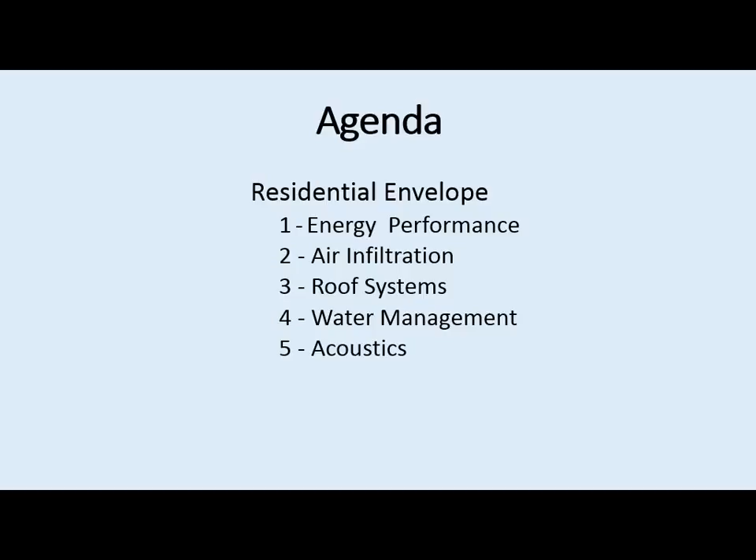I've identified 5 major subjects I'd like to cover, starting first with energy performance of the envelope, and then getting into the details of air infiltration, roof systems, water management, and acoustics.

In terms of energy performance, I've identified 3 major driving forces. First is energy codes, and I've spent a good deal of my professional career in the development of those. We also use economics, which are driven by fuel prices and construction costs. And we have environmental goals as a driving force for energy improvement.

If we want to talk about energy codes, we need a little clarification on definitions. The basis for energy codes are heating degree days base 65, cooling degree days base 50, and moisture levels - moist, dry, and marine. Once you define the climate zone, we look at the thermal performance of the envelope in terms of its thermal resistance, or R value, thermal transmittance, or U factor, and the solar heat gain.

This applies to fenestration, and that's a term for light transmitting devices. Not just a window, but it could be a glass block, or anything that transmits light.

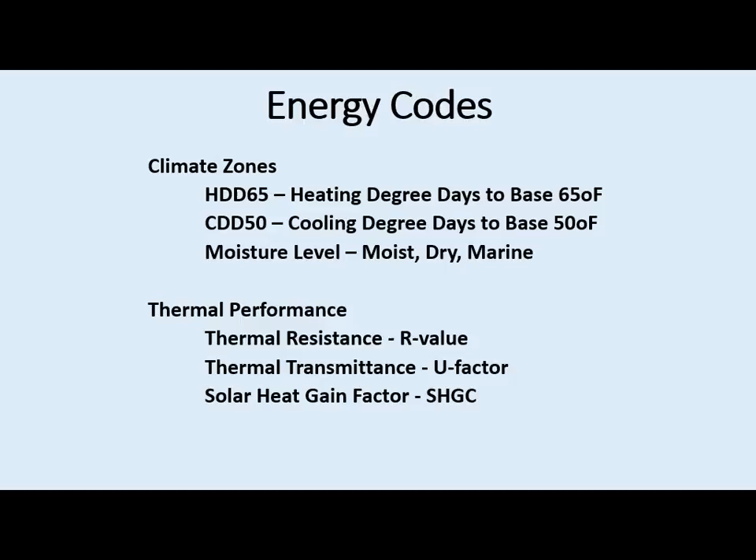So if we look at heating degree days, what are they? Starting with, on the left, we have heating degrees base 65. What does the base temperature refer to? Basically, it's the balance point of the house.

This was determined originally in the 1930s when people were delivering coal to homes, and they were looking for some weather measure to figure out when they needed to make the next coal delivery. They found that 65 degrees was a good correlation temperature. So that was used for many years, and it has been defaulted into our current codes today. It's by no means the balance point of a house today - a good energy-efficient house will have a much lower balance point temperature.

The way it's calculated: you look at the daily average temperature, shown as a dotted line on the left for heating, with 24 measurements for the day. The average is the dashed black line. In this example, I'm looking at 40 degrees as the average temperature. Our base is 65, so for that day we have 25 heating degree days. Each day of the winter we add those up, and that becomes the seasonal value.

24-hour measurement seems like a reasonable way to calculate the average, but it's entirely too sophisticated. So what's done is they take the maximum and minimum temperatures and average those to come up with the daily average temperature. The reason is that they don't have 24-hour measurements at all the weather stations - only first-order stations, about 1,000 of them, measure hourly temperature. Second, third, and fourth-order weather stations only measure max and min temperatures, which is why they adopted that process. That defines the heating side.

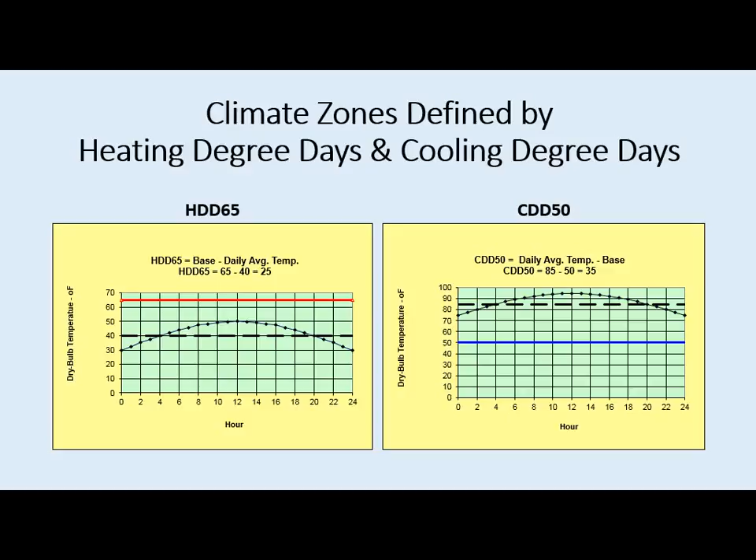So those are the 2 weather metrics used in energy codes. But how does that compare to long-term averages? I looked at the historical data for Columbus. On top we see the heating degree days, which are quite variable, and the same for cooling degree days on the bottom.

For codes work, we use a long-term average. The first set of codes used a 30-year average of weather data to set the codes. More recently we've gone to 15-year weather data, and we're seeing a change in what the codes look like because of that.

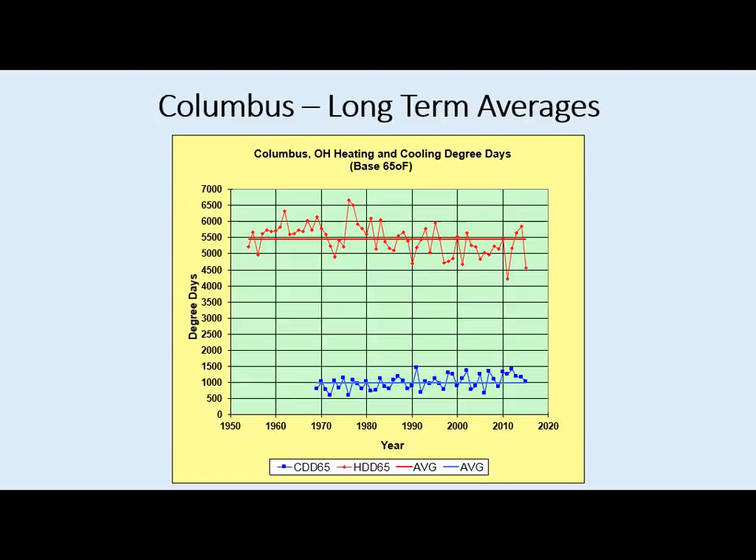So if we look at a code today, it's broken down by climate zones, and these are defined by the heating and cooling degree days. What are shown here are the 8 climate zones, starting down at climate zone 1 in Miami, coming up to climate zones in Ohio, which is predominantly climate zone 5. But along the Ohio River, there's climate zone 4 available. That's what's in the codes today, but that's changing.

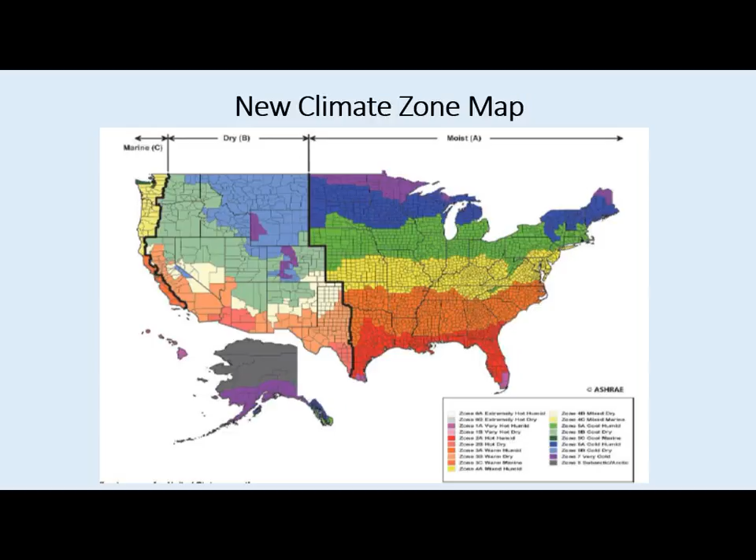We've just published the latest versions of the standards for 2016, based on the new climate zone map. There's still the same number of climate zones, but where they are has shifted. For Ohio, the current code has 9 counties along the Ohio River in climate zone 4. But in the new code, we're going to have 24 counties in climate zone 4, Franklin County being one of them that has changed from climate zone 5 down to climate zone 4. So it's gotten warmer in Columbus, which changes the criteria.

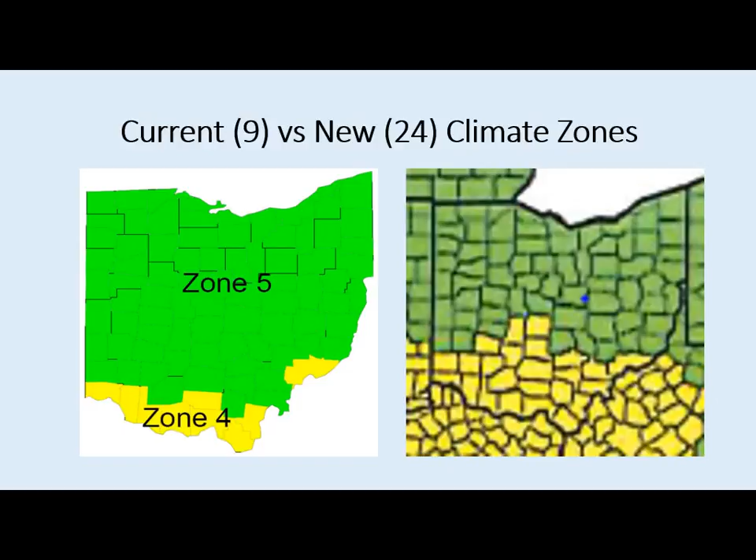The way we represent that is a map showing heating degree days on the horizontal axis, cooling degree days on the vertical axis. I plotted 4,000 plus stations in the U.S., and in the center of it are all the locations for Ohio. The little yellow triangle shows the original version of Columbus, and the dot shows the current version. It just crosses the line at 5,400 heating degree days. That's what changed it from climate zone 5 down to climate zone 4.

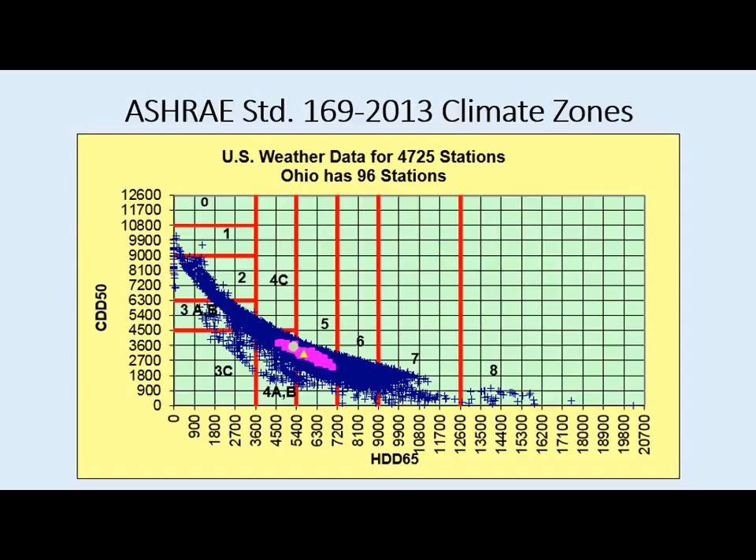If we look at the first energy code in the United States, it was published in 1975 following the 1973 energy oil embargo. The goal was to eliminate the lowest 20% of the housing stock being built at the time. That was developed by a committee within ASHRAE of 100 people, 10 subcommittees, 10 people on each subcommittee, and they used professional judgment to set that criteria.

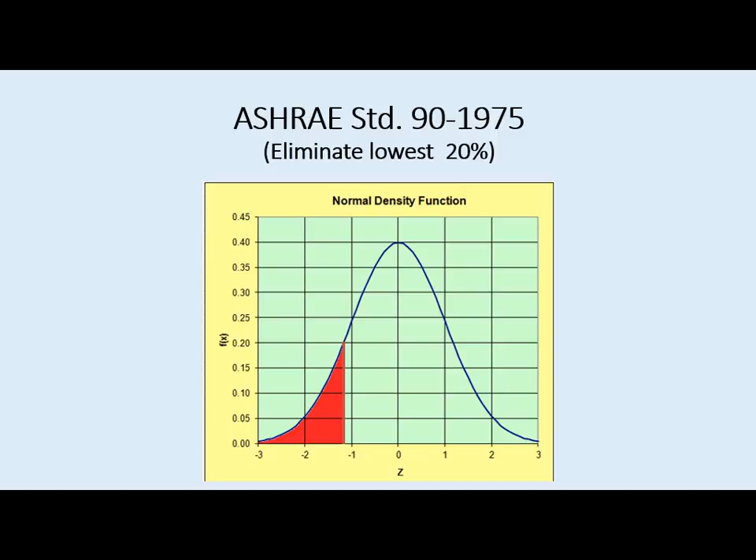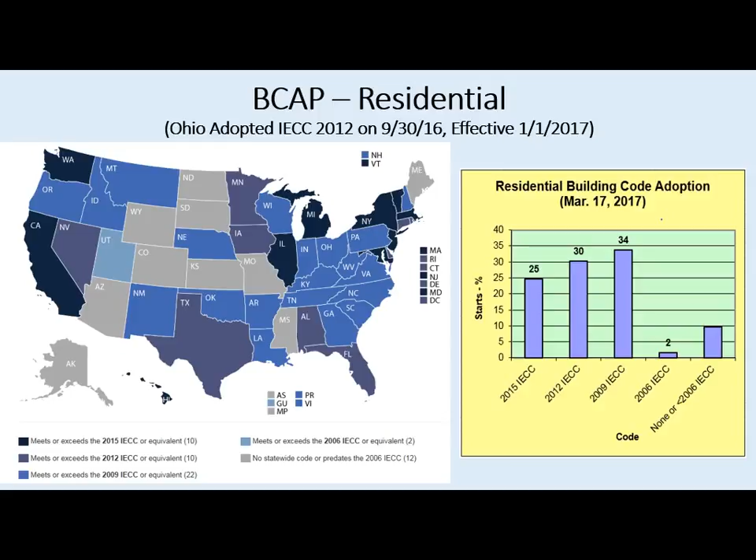We see that the predominant adoption is still at 2009. We're seeing increases above that, but we also have the laggards—a couple locations still using 2006, and about 10% of housing starts are covered by no code at all. So there's still a lot of opportunity for improving energy performance just in code adoption. This has become a recent focus of the Department of Energy, to encourage states to maintain current versions of energy codes.

When we talk about the criteria in energy codes, one of the major variables is thermal resistance, called the R value. I've listed some typical materials, starting with a single sheet of glass, which has an R value of 0.1. An asphalt shingle is 0.4. A half-inch drywall is about 0.45. A half-inch oriented strand board is 0.6. Aluminum siding is also 0.6. This next one is really important, and that'll come into play later: an 8-inch concrete block has an R value of about 1. Also, 8 inches of solid concrete has an R value of about 1. So when you build your foundation, you're not getting a lot of thermal protection from the masonry units themselves. Carpet is 2. A double pane window gives us an R value of 3.

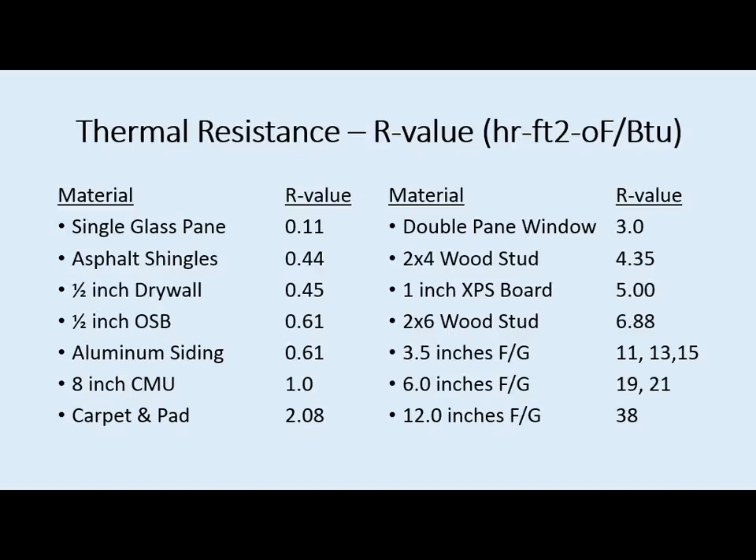A 2x4 stud, a common construction material, is a little over 4. A 1-inch XPS insulation board is R5. A 2x6 stud is almost 7. Then you get into insulation, and depending on the density, a 3.5-inch thickness cavity can be 11, 13, or 15. A 6-inch cavity can be 19 or 21, and 12 inches can be an R38. So this kind of calibrates you on the values that appear in the energy codes themselves.

If we look at the 2015 residential code, it's broken down by climate zones. We have climate zones 1 through 8 today. Going forward, we'll have 9 climate zones, adding a new climate zone 0. It doesn't appear yet in the 2015 standard.

Climate zone 0 is developed for international applications and focuses on locations centered around the equator, so there are no U.S. locations in climate zone 0. That may not appear in future energy codes for the U.S., but the work we do for international standards is very important.

What we see is that the criteria for fenestration is listed in terms of U factors. The U factor is just the reciprocal of the R value, and it's for the entire assembly, so you're looking at the total performance of a window unit - that's the glazing unit and the framing. So it's a composite metric.

Similar U factor for skylights. Then we have the solar heat gain coefficient. The values start out at 0.25 and go up to no requirement. The scale is 0 to 1, where 1 represents the solar heat gain through a single sheet of glass. So if you'd like to control your solar gain, you'd want a lower value than 1. A value of 0.25 in climate zone 1, near Miami, is a low value.

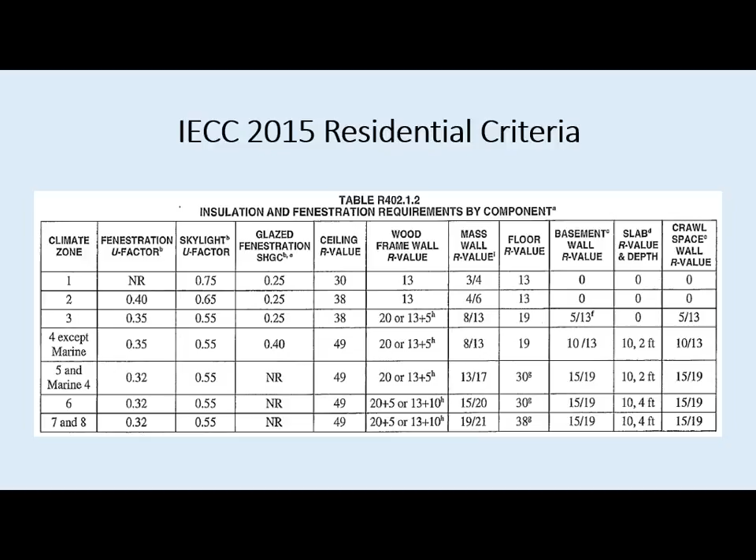In terms of fenestration, what I've shown here is an example of the options available. I've shown 173 fenestration options, and then look at what happens by climate zone.

The first one is climate zone 1, which is the yellow dot, showing on the horizontal axis a U value of 1, where there's no products there. But you also have to meet a U value or a solar heat gain coefficient of 0.25. So in order to meet that requirement, you'd have to pick a material with a U value on the order of 0.6 at best. So you're going to do better than what the code requires just to meet it, because there are 2 criteria.

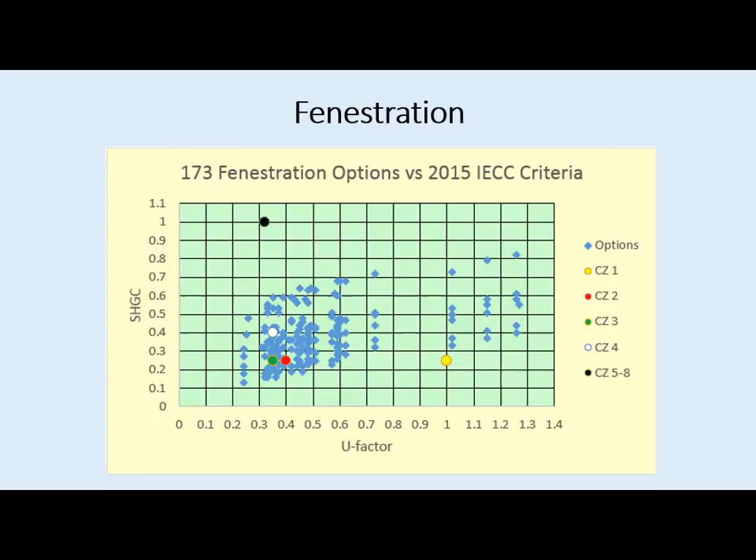We have similar trends in climate zones 2, 3, and 4. When we get to climate zones 5 through 8, we've got the black dot, which shows a solar heat gain factor of 1. There's really no requirement in cold climates to reduce solar heat gain, but to meet the U factor, you're going to have a solar heat gain factor on the order of 0.6 or less. So the codes are set not to limit construction options, but to give you choices.

Once you make those choices, what kind of performance do you get? I've looked at 3 different locations. The first one, on the left, is for Miami, looking at the energy performance of a 5-foot window, whether it's single, double, or triple glazing. You can see there's a tremendous impact due to orientation, which makes the design of your house important in terms of where you place your windows - there's a big energy consequence of that orientation selection.

If we look at the middle graph, this is for St. Louis, similar to what we'd see in Columbus. You see the introduction of both heating and cooling impacts. Again, orientation shows a big impact in terms of solar energy, so orientation is also important in the center zones of the country.

The third graph is for predominantly heating, this is Bismarck. You see predominance of heating energy use and cooling energy use, but again, very sensitive to orientation. So that's very critical in the overall design of your house.

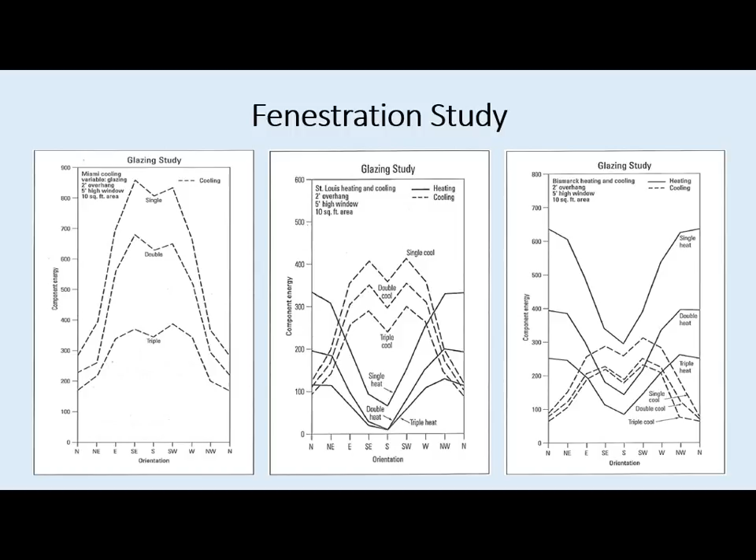One of the major driving forces in developing energy codes are fuel prices, and what we see is over time they have continually increased, but it kind of does this in steps. We start with looking at heating and cooling energies - they're relatively flat, then they go through a transition period. The overall trend is fuel prices are increasing, have been, and probably will continue to increase.

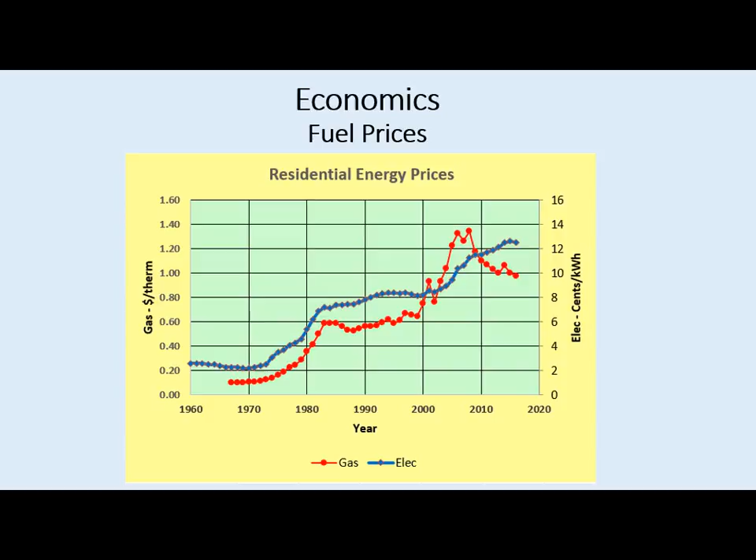And then we see this issue of gas prices - they peaked and have come down. That's been due to fracking and other exploration activities in the U.S. that has lowered our price for natural gas. But we account for that in the development of our codes and standards.

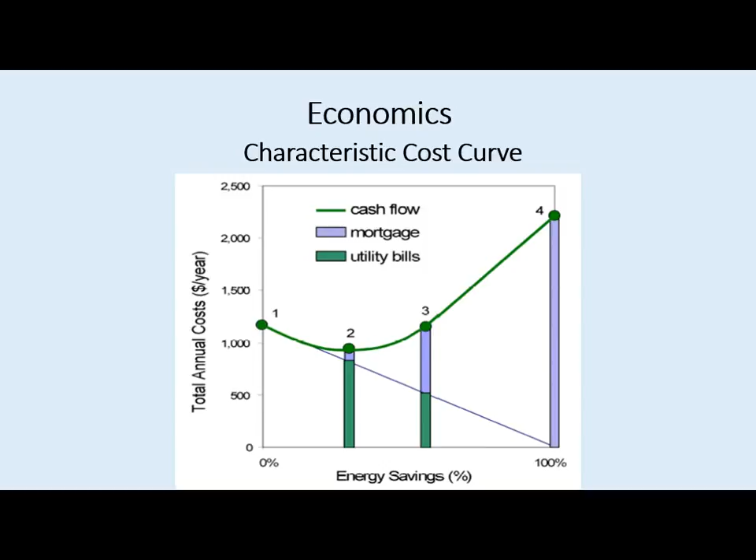We go through that and look at point 2, characterized as the minimum of the cost curve. We look at point 3, where we've reached cost effectiveness of conventional installations. To go from point 3 to point 4 is another step in terms of technology, primarily renewables. So in developing codes, we look at what's optimum economically to set the criteria as point 2. So what does that look like in terms of details?

I put together a simple example showing insulation - this would be primarily blown insulation you might see in an attic, because you can have a continuous value from 0 to any level you want. But this process applies to any of the metrics in the codes and standards, whether it's insulation, fenestration, air infiltration control, or HVAC equipment efficiencies. Any metric can be used on the horizontal axis.

What I'm showing here is there's going to be an increase in cost of that metric with increased performance. Combined with that is the performance itself in terms of energy savings, and that's the second curve. What we see here is this law of diminishing returns - the more energy efficient you get, the less benefit you get from that. So those are the two primary drivers in setting the codes.

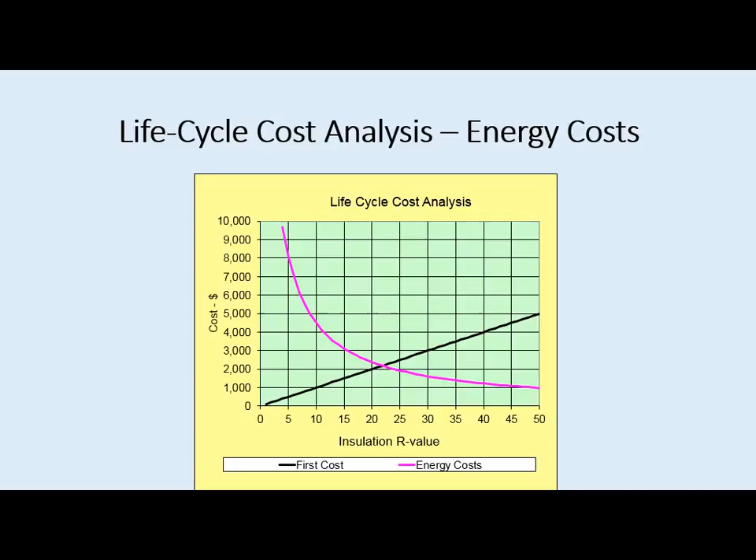And these are the life cycle costs. So when we're looking at energy costs, we're looking not just at energy today, but projecting energy costs out in the future, 30 and 50 years ahead. If you can do it with any confidence, I'd appreciate that information, because it's always quite controversial. In terms of the first cost, we also look at the impact of assuming it's being mortgaged, so there's interest rates to be concerned with, and tax considerations. Those are all accounted for in that first cost curve.

So these are the life cycle curves, and what we do is take these two curves and add them together, point by point. We come up with the green line, and that's the optimization curve we use to set the criteria. What we see is that it reaches a minimum point, which we refer to as the optimum. In this case, it's a value of like R21.

We do this calculation for each climate zone because it changes with weather. What climate zone is this? This is just an example - it was, I think, done for Chicago.

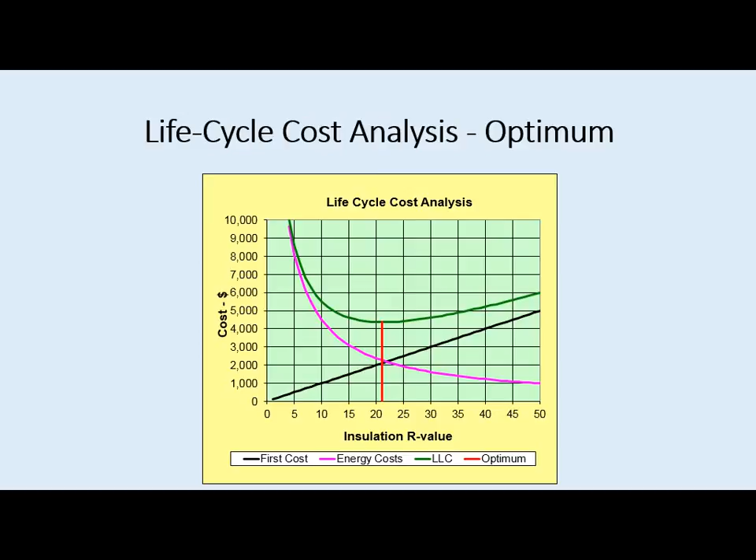When we're setting the codes and standards, we realize that optimum may not be consistent with how it changes from one climate zone to the next. So this is where the committee uses their professional judgment. We could have options on either side of that optimum.

I've shown an exaggerated view of point A and point B. It may not be that far apart, but the point is that they both have the same life cycle cost. So from our perspective in setting the codes and standards, the end user should be neutral, their life cycle cost is the same. The question is, how does that change from one climate zone to the next? Is there a progression that makes sense?

We go through and set those values, and in all the code work we do, we have to send that out for public review. We get comments, and we have to respond to those comments, and we get proposals to change them one way or the other. So we have two driving forces here.

If you're the builder, you want to minimize your first cost, so you'd pick point A. He doesn't care about the utility costs, that's somebody else's problem. If you're the homeowner, you might be concerned about point B. I know that energy prices are going to increase, so I might want to spend more and have those advantages, not knowing with any certainty what the fuel prices are going to be.

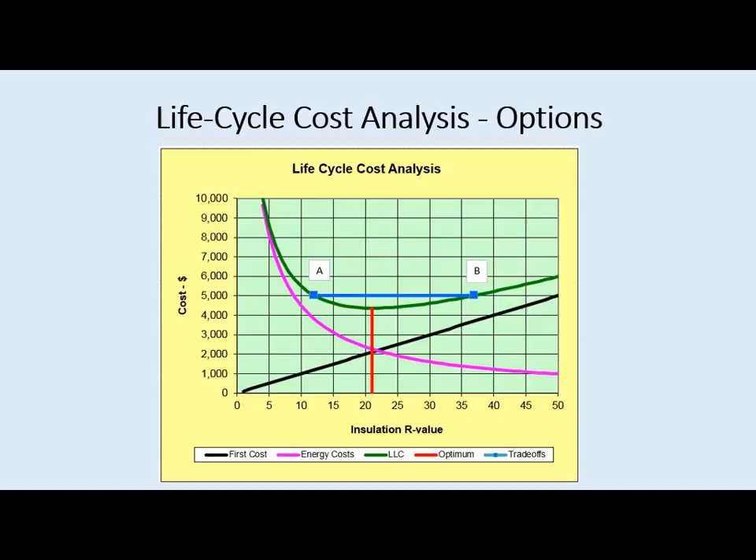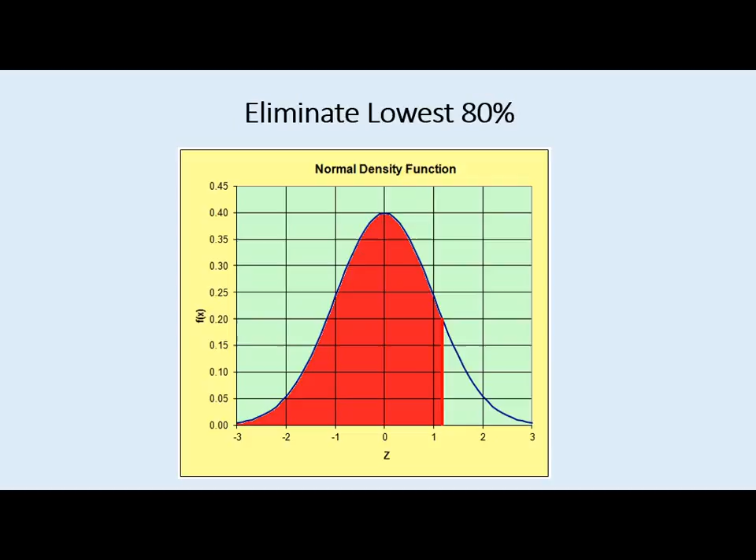So the third major driver are environmental goals for setting codes and standards. And the major driver for this has been what's referred to as the American Institute of Architects 2030 Challenge. This was developed by Ed Mazria from AIA. The goal is to have all buildings be net zero energy by the year 2030. That has been a major driving force in the development of codes. It has been aligned with and accepted by ASHRAE, AIA, USGBC, U.S. Conference of Mayors, and the state of Florida. So this is getting a lot of legs. I'll show you the impact of that in just a moment.

So what does that mean? If we're looking to net zero energy, we can go down our cost curve. We get to the optimum, shown here on this blue curve. And for the red dot, I've shown the 2015 IECC criteria for a particular location. Once you go beyond that, it starts to get very expensive using code metrics to make that improvement. So what are the options?

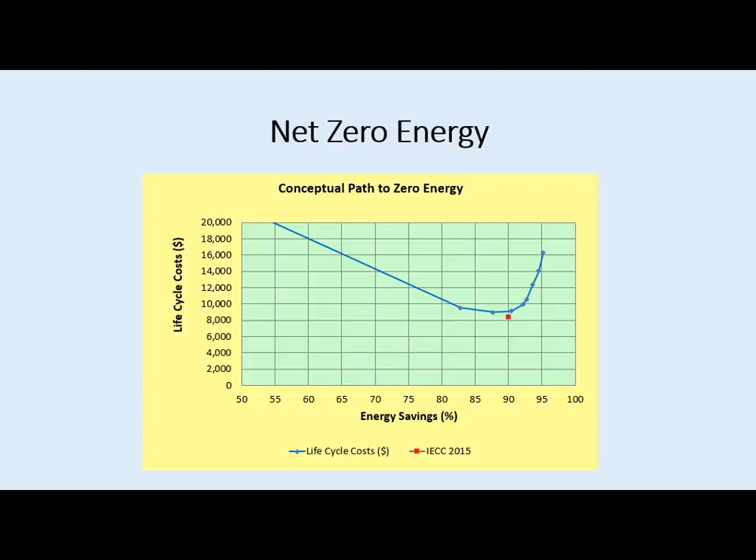So what we look at is what has the energy savings over time been? Starting in 1975, we put this scale together, with the vertical axis showing 100 being the value of the standard in 1975. The standard didn't change for about 10 years, and then we saw minor improvements. Then in 2006, when AIA came up with the 2030 initiative, the Department of Energy got involved with ASHRAE, signing a memorandum of understanding saying DOE would provide technical support to ASHRAE if we would work towards this 2030 goal. So ASHRAE embarked on that, and you can start to see a major decline in terms of the energy use.

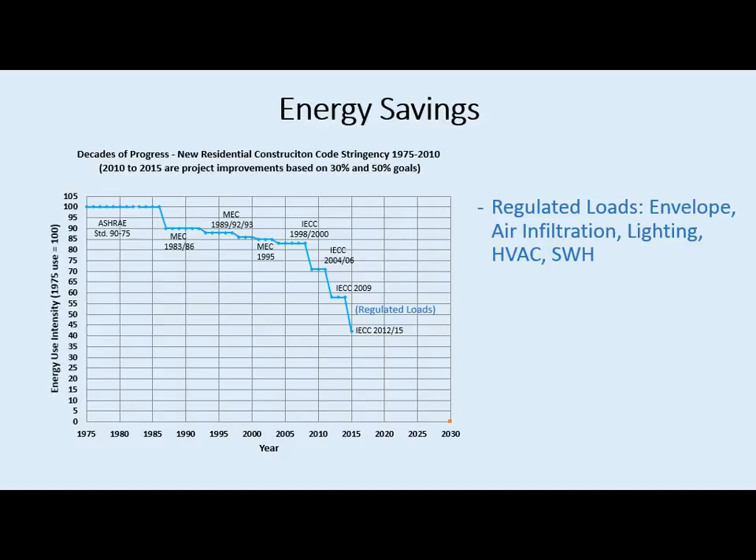That has taken us down to 2015, where we're estimated to be around 40 on this scale. So we've saved a tremendous amount of energy with the impact of energy codes, but those only address part of the energy use of a house - we refer to those as the regulated loads. That would be the envelope, air infiltration, lighting, HVAC, and service water heating. So what's left? How do we get from where we're at 40, down to this red dot at 2030, which is zero energy?

Well, the first step is to look at what we call plug loads, and that's anything that you can plug into the electrical outlet. So it'd be refrigerator, ovens, microwaves, a whole list put together. It may not be all inclusive, but one thing you can do is make those Energy Star selections, and that will help achieve energy performance. But they're not covered by the energy code - that's something the homeowner has to do after they move into the house.

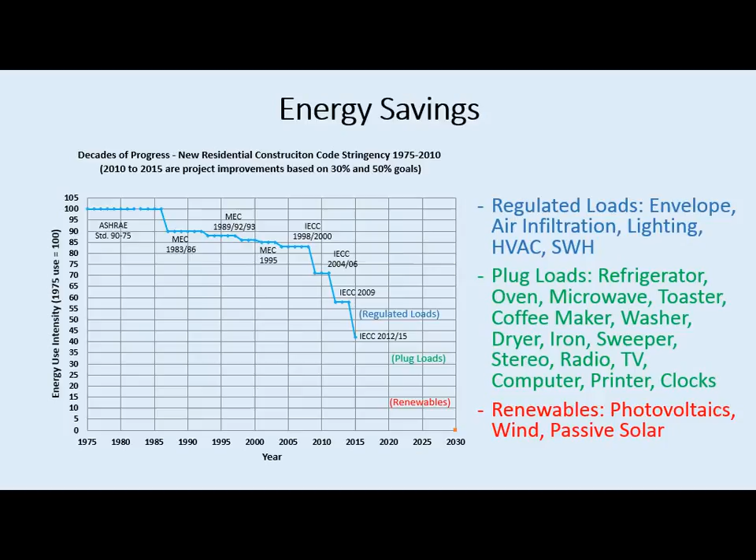That'll take us down to some level, I don't know what it is yet, but to finish it off we're going to have to go to renewables. That's going to involve photovoltaics, wind energy, or passive solar designs. So those are the challenges confronting the codes and standards development.

What do we do in terms of specific construction? Looking at particular options, we have concerns in the codes and standards with thermal bridges. A thermal bridge is a low thermal resistance path connecting two surfaces.

On the left is a typical 2x4 wood frame wall. We put R13 in the cavity, and the wood framing member is R4. Collectively those perform at a composite value of about R11. Add other construction, sheathing, siding, drywall, air film coefficients, and you get an overall performance of 18.6 for that wood frame wall.

Now you have an option: you could build it out of steel. When I first addressed this problem around the year 2000, I got a call saying the steel's so thin, I'm just going to ignore it and assume I get the full R13 in the cavity. So I dug around in our research files and found tests we had done, and I was shocked at the performance realized: that R13 wall, in conjunction with that steel, performs at about an R6.

I said, what's going on here? Was the test right? I checked, and yes, it was correct. I did some back-of-the-envelope calculations and found that steel is a factor of 1,000 greater in terms of heat transfer than the insulation. So it doesn't take very much steel to create a huge thermal bridge in steel construction.

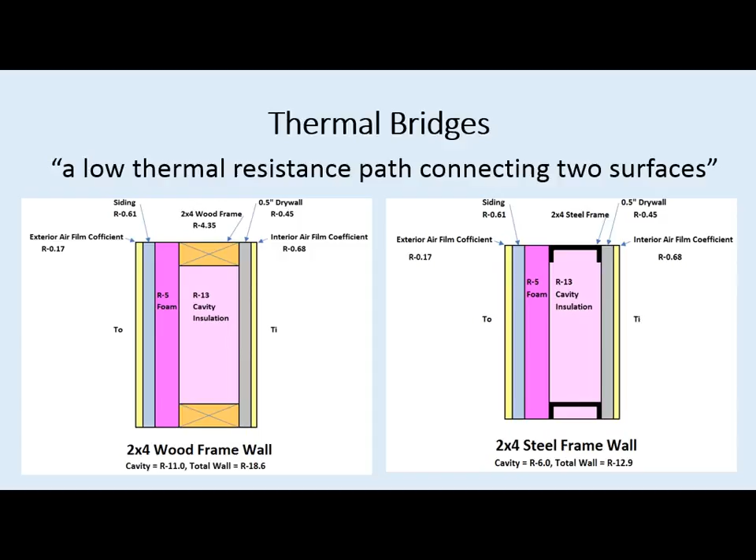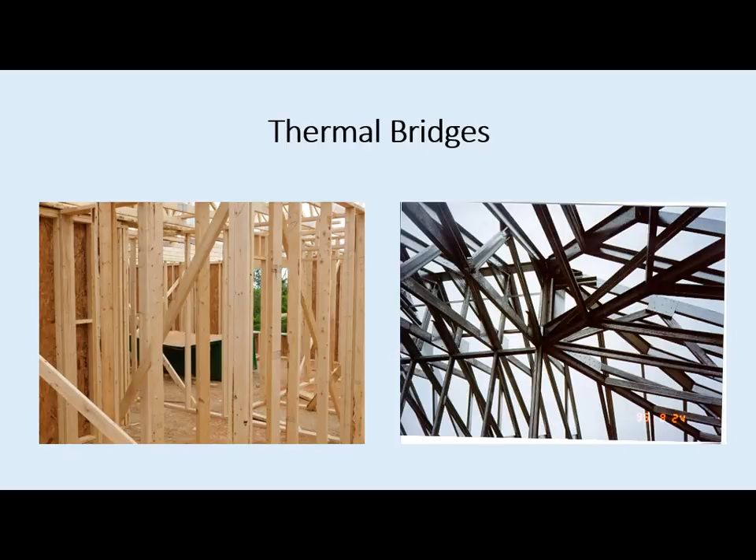So is that important? Well, if we look at how a house is built, we see a lot of wood, we can see a lot of steel, and that's a major difference in terms of the energy performance that's realized.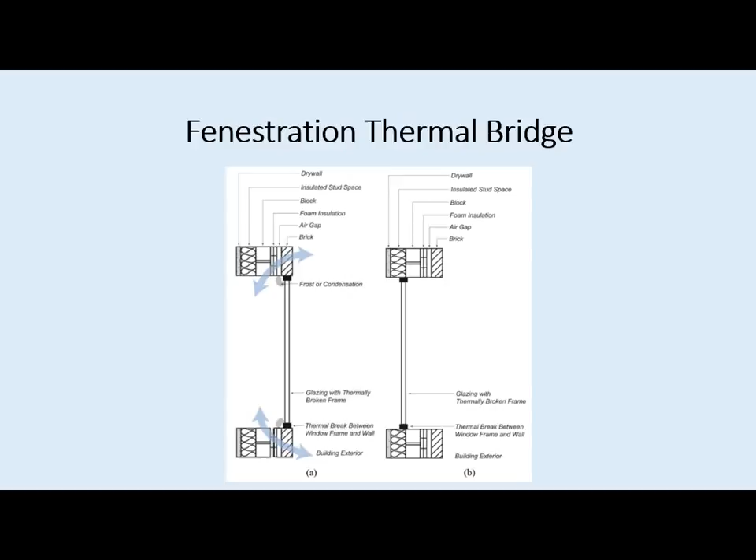Other thermal bridges to consider: when you install a window in a wall, where do you put it? The diagram on the left shows it installed on the exterior. You might think that's a good place for drainage, but in terms of thermal performance, you'd want to install it in the same plane as the insulation to eliminate thermal shorts and condensation problems.

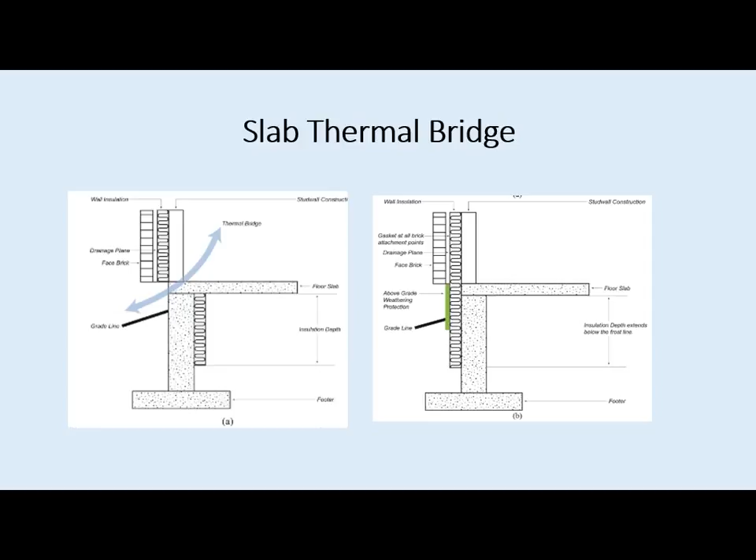Slab edge insulation: you exterior-insulate the wall above grade, and below grade you insulate the interior. You think you've added insulation, but you've created a tremendous thermal bridge, a short circuit. The best solution is to have the exterior insulation run continuous. To do that, you have to provide some sort of protection for that insulation above grade, and a lot of people either don't insulate or don't do the protection right, so that can be problematic. But there are solutions to that problem.

Another problem is basement walls. You might insulate the basement wall up to the grade line, covering 90% of the wall, and think that's taken care of the problem. But wait a minute, that basement wall has an R value of 1. That means it's a tremendous heat conductor, so the insulation on the outside might as well not be there. It's doing virtually no benefit. The soil provides benefit, the insulation doesn't add anything to that. So you're bypassing all that insulation and the soil when you have that exposed above grade.

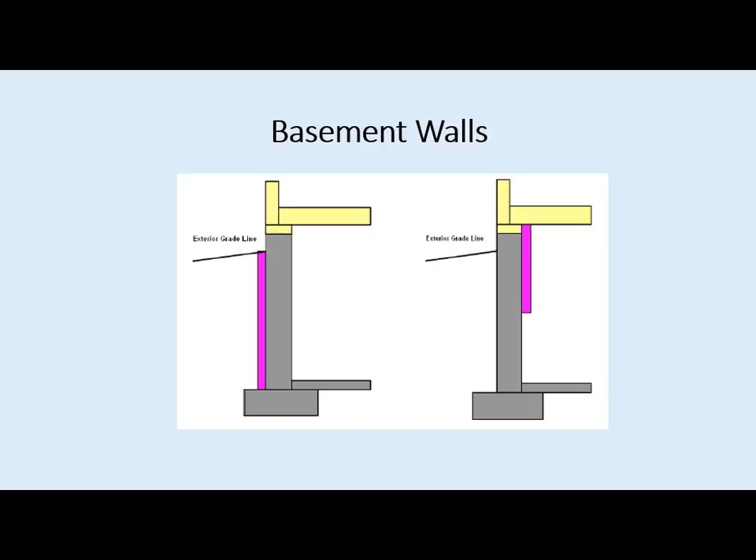Well, let's solve the problem: let's go inside and insulate on the inside, but we don't need to do the whole wall, we'll just go halfway down. Wrong. That vertical wall is R1, so you're just bypassing all that insulation again. So those two things you don't want to do. You think you've done the job right, but you haven't. You've created thermal bridges.

I showed you the impact of wood framing. So if you go to a typical construction site, which I did to take these pictures, and look at what's being done today, the amount of wood that's used is incredible. I was amazed at what I'd refer to as excess.

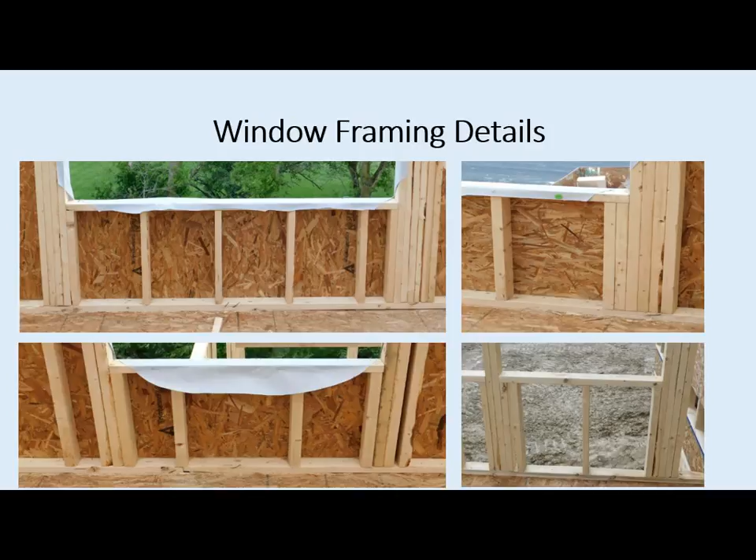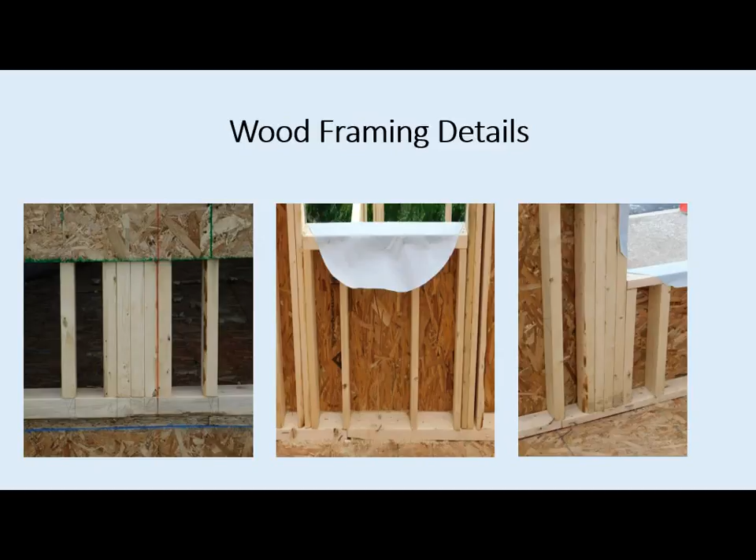There are procedures called advanced framing technologies that you can employ that give you the same structural performance but not the same level of wood framing or these thermal bridges. It exists in windows, doors, headers—no matter where I looked, there were multiple stud paths. So are there solutions to that?

Of course. What I've shown here on the left is a corner detail that involves 3 studs. It makes it difficult to insulate and gives you thermal bypasses. On the right is a 2-stud corner. Now that requires drywall clips in order to hold the drywall, but that is a technique that can be used and gives you considerable thermal improvement.

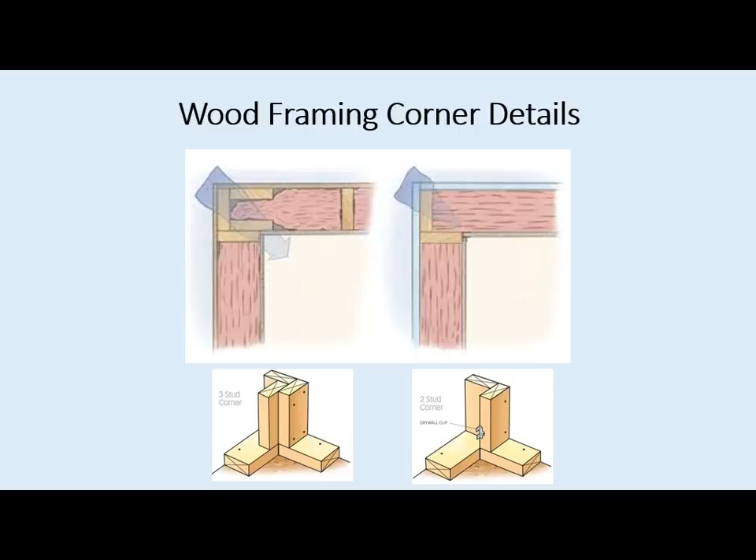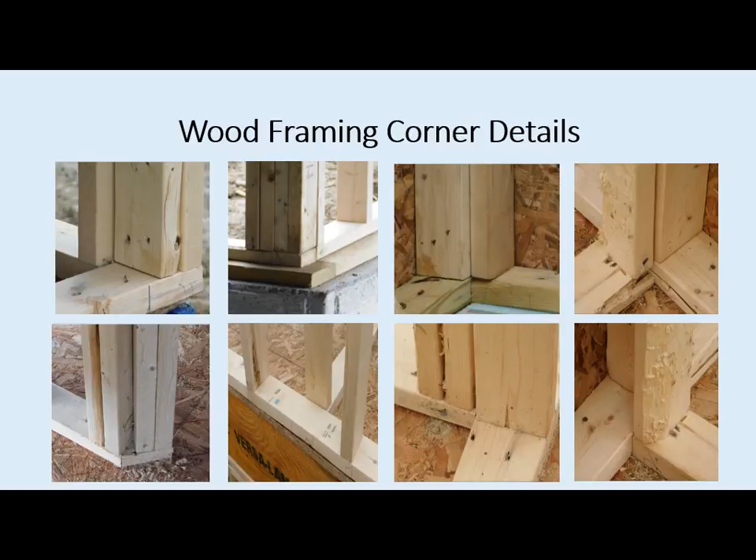So you go out to look at the typical house with all the corner details. I didn't see any that satisfied what I would call good design. And it just continues, the problems are just everywhere I looked. Then I thought, well, how does steel look?

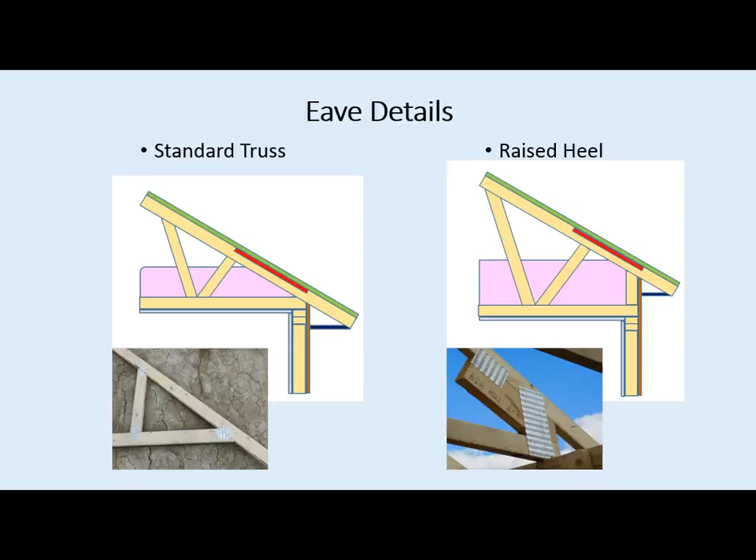So the solution is referred to as a raised heel truss. You build that up, allowing the insulation to become full thickness clear out to the edge of the wall system, and you get the thermal performance that you would expect.

One solution I showed on the 2x4 walls was foam board sheathing. You have options: you can buy 1-inch foam board sheathing, or 1.5 inches, or 2 inches, or 3 inches. In terms of codes, we set a maximum of 3 inches because of how you install something thicker than that—trying to drive a nail through more than 3 inches is a challenge. It could be cost-justified at 4 inches, but they said you can't build it.

So if you have a choice, you can buy a 1-inch board. You can get an R5 in the XPS type of material, or an R6 in the polyiso. Which one would you buy? Does it make a difference? Well, sure, the R6 is a better performer—I'll take that. Well, let's talk about that.

In the rating of foam boards, the Federal Trade Commission has what they call Rule 460, and it requires all manufacturers to rate their products at 75 degrees mean temperature. So when you do that, the XPS on the left is shown at 75 degrees to have an R value of 5, and the polyiso at 75 degrees has an R value of 6.

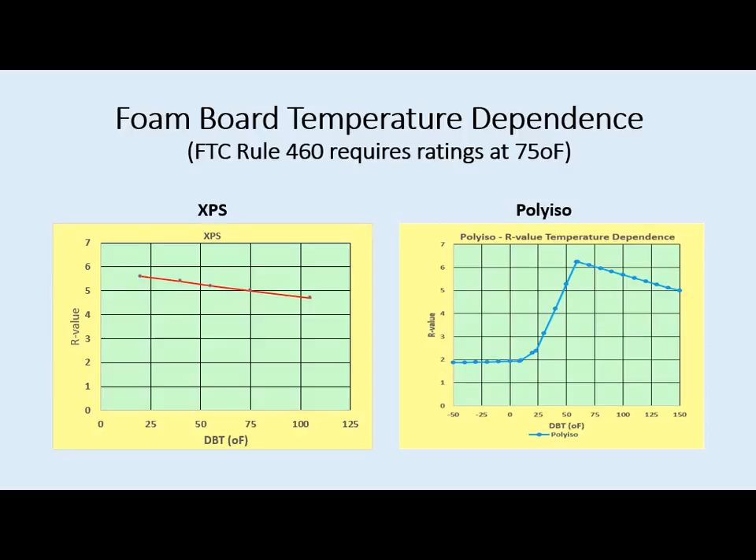But they're also temperature dependent. In terms of the XPS, as it gets colder, its performance improves. In terms of the polyiso, the performance improves up to a point, and then you see this dramatic drop when the blowing agent starts to condense.

So what does that mean in terms of application? If we overlay those curves and I show you the temperatures of Columbus, Ohio, what do they look like? This is the distribution of temperatures, and below 50 degrees—about 43% of our temperatures are below 50 degrees.

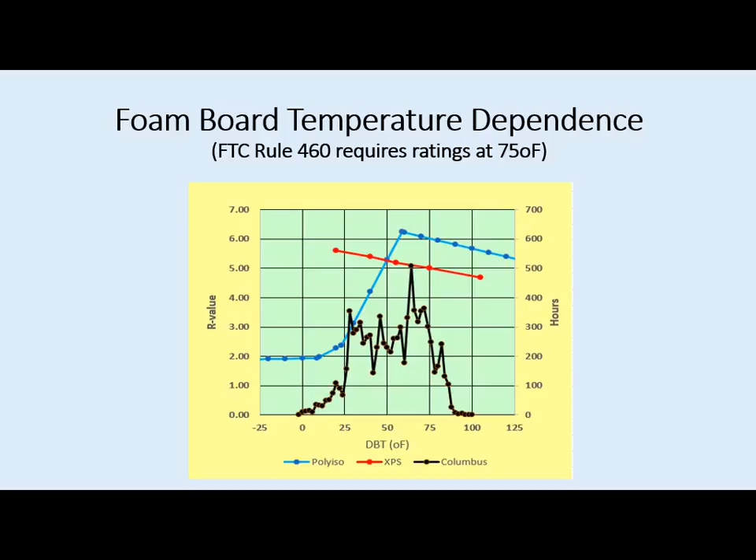We see a tremendous drop-off in the polyiso. So you can go through and do an annual calculation showing that the R5, the red line, gives you overall annual performance better than the R6. So you need to keep in mind product performance, not just at rated conditions.

I have a home that's ICF, insulated concrete form, it's 10 inches. How do you compare the performance of insulated concrete form and structural insulated panel to lumber? Well, you have to go through and do that comparison on a U value basis.

That's the other part of the standards: they list the prescriptive requirements in terms of R values, but they also list the performance factor in terms of U values. So if you meet that U value requirement, you're in compliance with any material, and that's why that option is provided in the codes—it gives you that flexibility. You'd have to go through and do those calculations to make sure you're in compliance, but typically that's not a problem with those types of construction, since they're very energy efficient and have no problem meeting codes.

Second major item I want to talk about is air infiltration. This is the flow of air from one side of the envelope to the other due to pressure and openings.

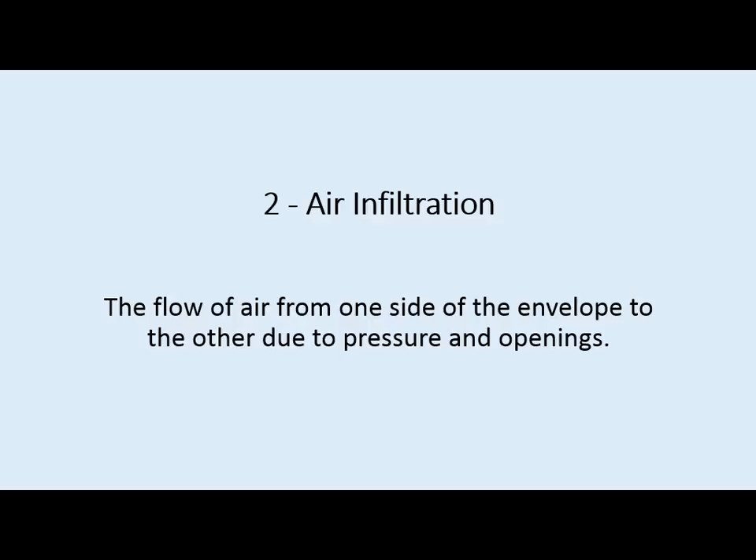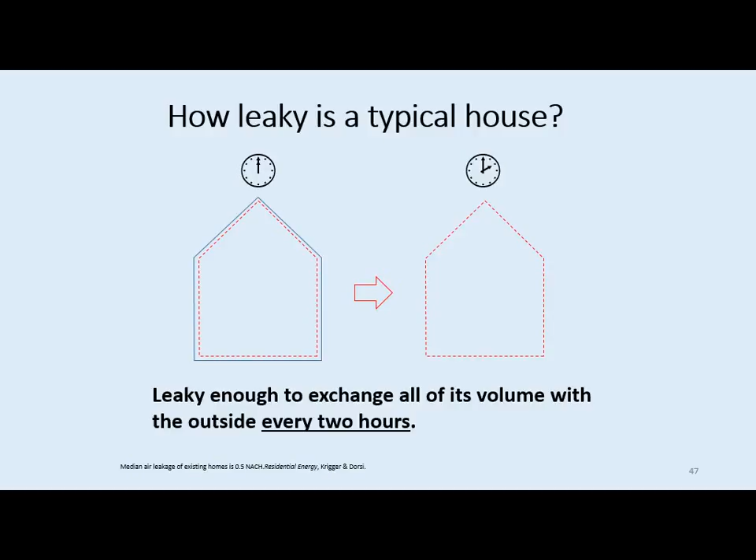So how leaky is a typical house? Well, typically it will exchange its volume every 2 hours. But we're setting codes to be more stringent.

So what's the energy penalty? Well, it's a function of climate, size, leakiness, and many more. It accounts for between 25 and 40% of the energy use of your house, so it's something you need to consider.

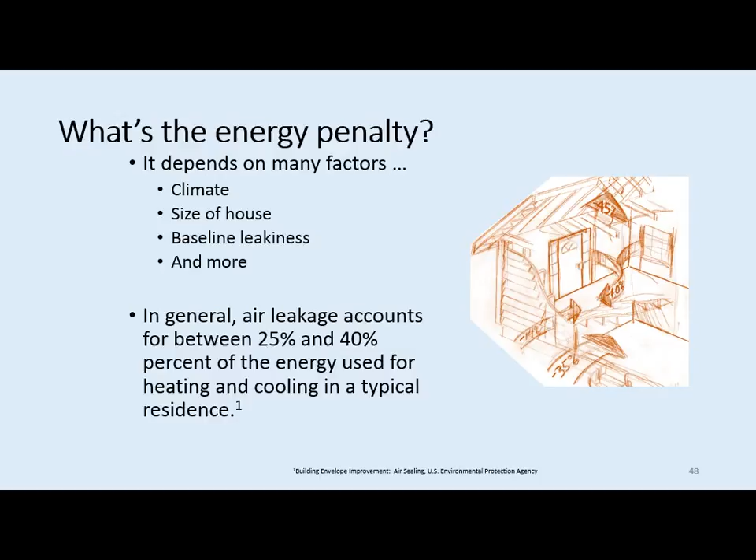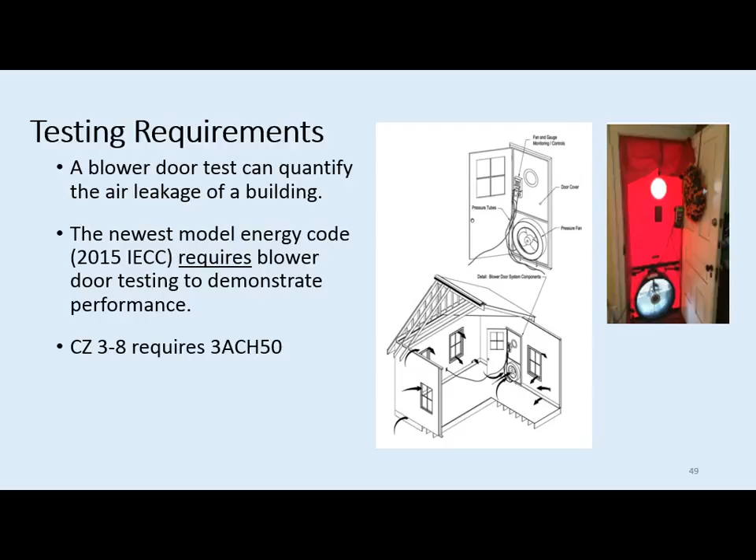So how do you test that? With a blower door: you pressurize your house and take measurements. Now the codes have set requirements, and for climate zones 3 through 8 it requires 3 air changes at 50 Pascal. Well, what does that mean?

Well, you have nearly a mile of joints in a house to connect. Which ones are the most important?

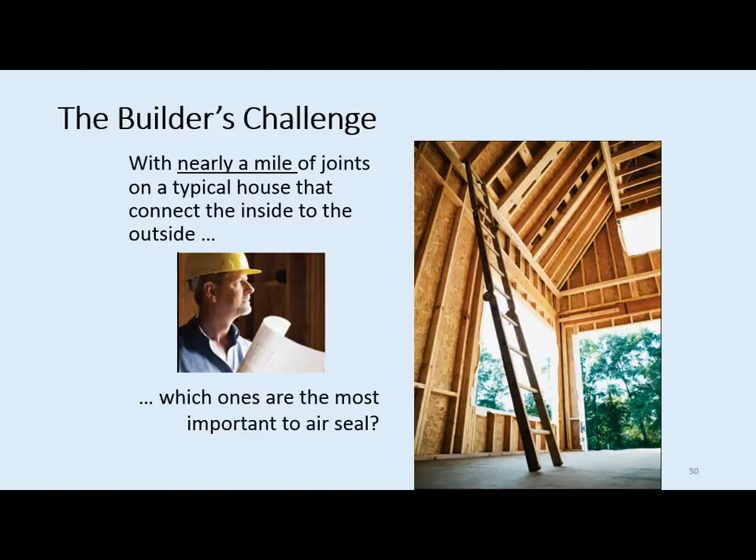So the infiltration requirement for the IECC was 3 air changes at 50, and that 50 is comparable to like a 20-mile-an-hour wind. Now, you're not going to have that in your house on all surfaces, but it's a pressure test that we do, and we extrapolate those results down to 4 Pascal. That corresponds to about 4 miles per hour, which is more representative of what you'd see in a house, and we refer to that as natural. So at 3 air changes at 50, we're looking at about a quarter of an air change per hour to meet the code.

So how do we get to that level? Owens Corning conducted a major research study to answer that question, and what we looked at is what are the options to get to that ceiling.

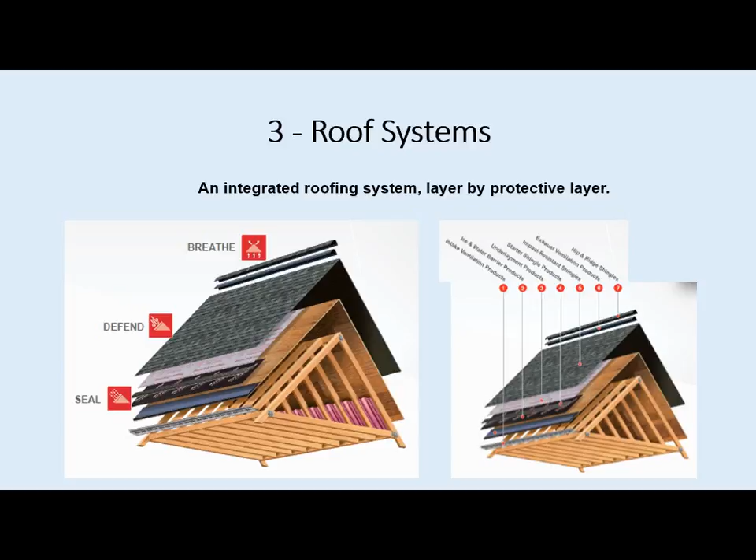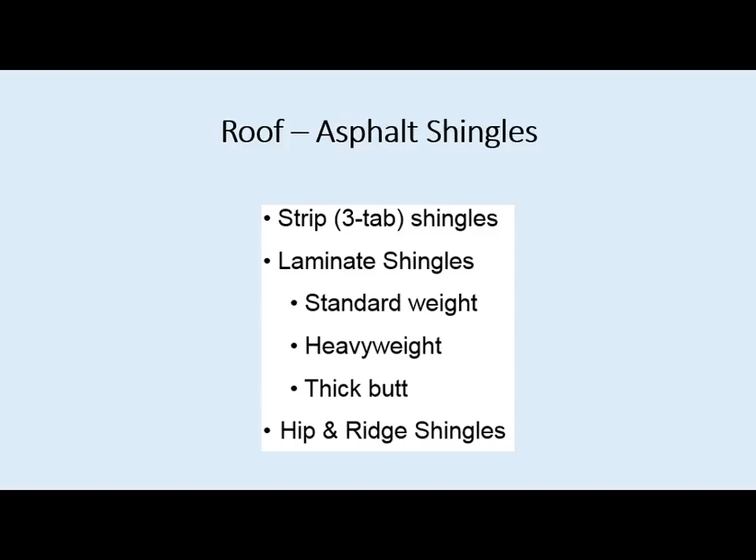So you have choices in terms of asphalt shingles: you can have a 3-tab shingle, laminate shingles of various weights, and hip and ridge shingles. These give you different levels of durability in terms of length of life.

You also have sheathing requirements for the construction of a roof, because you want to have these shingles firmly attached. How do you do that? Well, there are codes specifying how to install those correctly, how you install the nails to meet compliance—shown on the left—and 3 examples on the right don't comply.

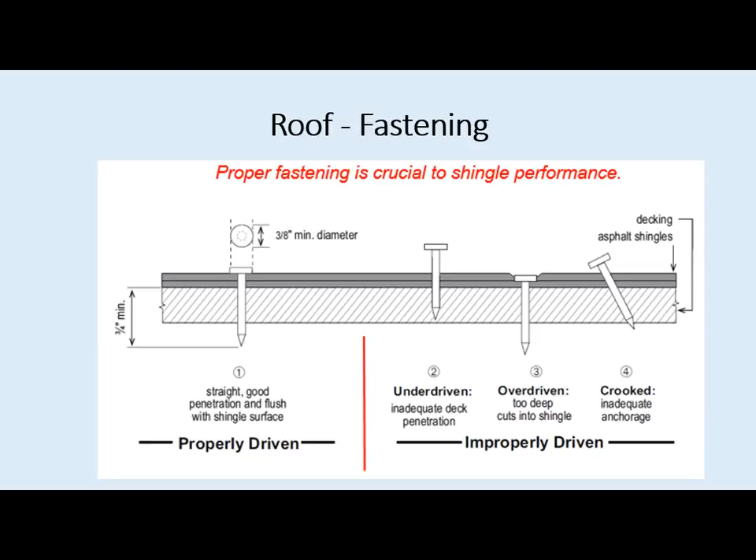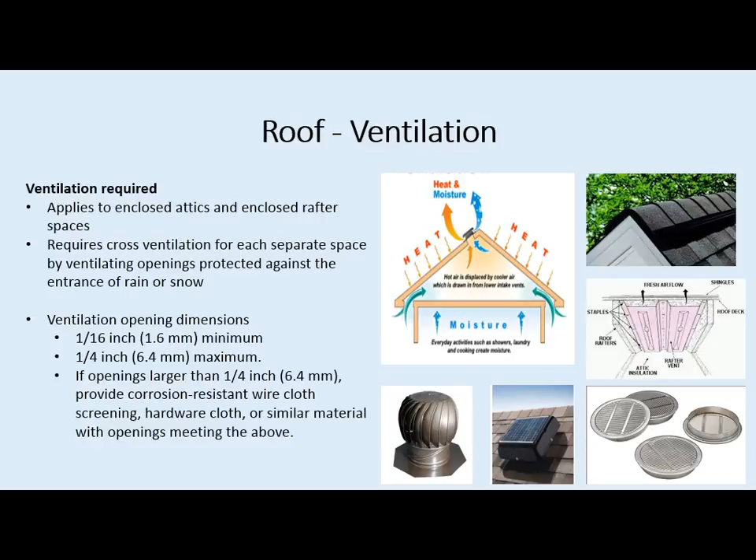Ventilation is a major requirement for roofs, and you do that by having air enter at the eaves—you can have strips or little caps, shown on the right, to provide that ventilation. It goes into the attic space through those vent cavities I showed earlier on the hip roof, and then exhausts near the top, which can have ridge vents, shown in the drawing on the right, or little louvered mechanical devices shown below the figure.

We also want to have the proper wind resistance, and that changes by climate zone. So different tests are conducted on shingles, and different constructions are built for different areas of the country. You need to keep that in mind in selection of materials.

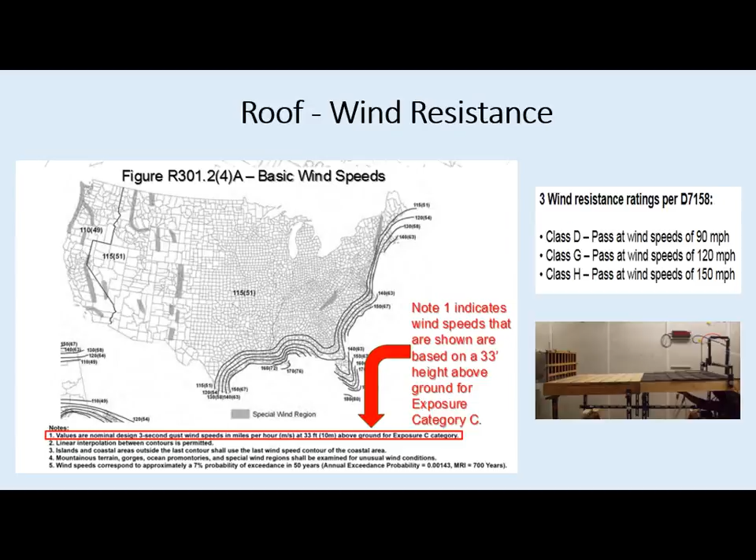You need to look at impact resistance—hail. You don't want that to destroy your roof, so those are tests we do to protect against impact resistance.

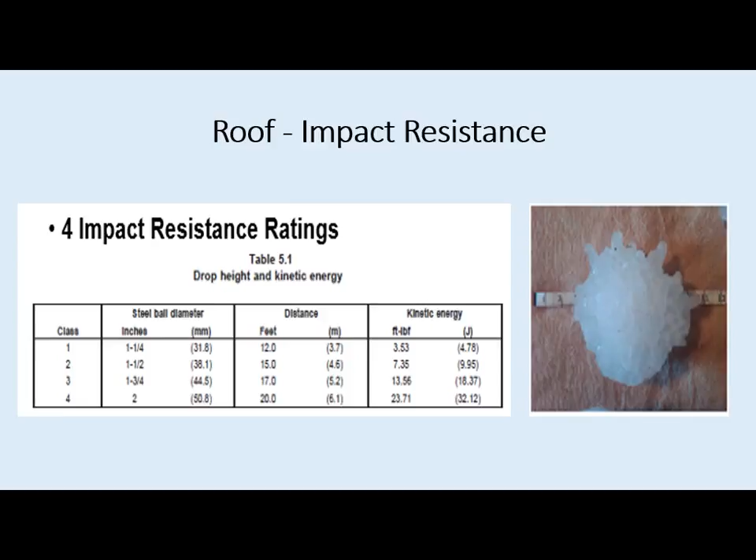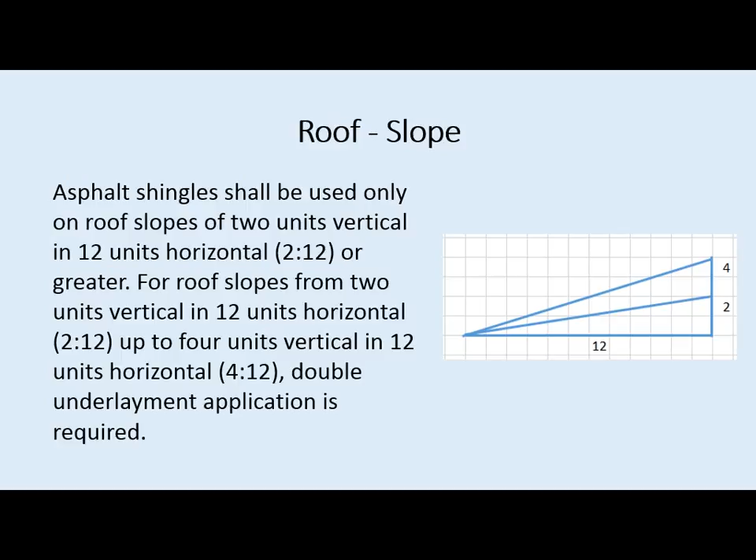Finally, shingles can only be applied if the roof pitch is greater than 2 and 12. Between 2-and-12 and 4-and-12, you need to have double underlayment application required, and above 4-and-12, a single layer is sufficient.

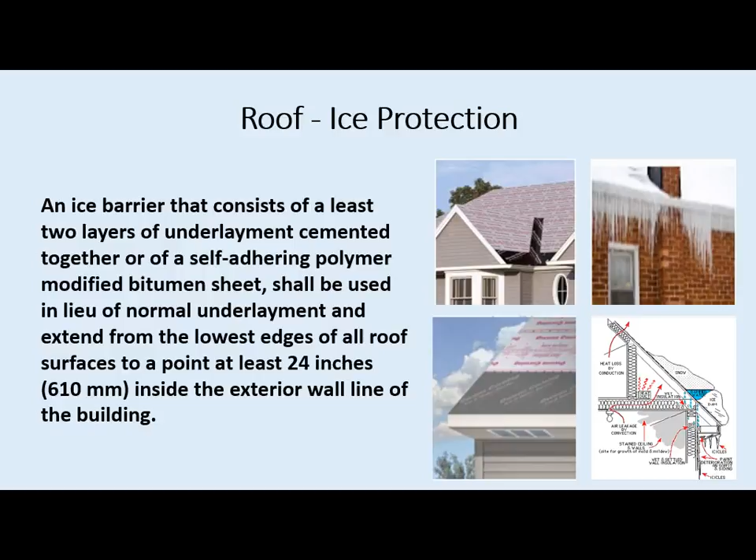You also need ice protection. I talked earlier about ice dams, and if those occur, you'd like to avoid them in the first place. With proper thermal design, you can avoid or minimize those, but you want to have drip edge and underlayment installed so that if you do encounter that, the water isn't coming back into your attic. There are details on how that's supposed to be installed.

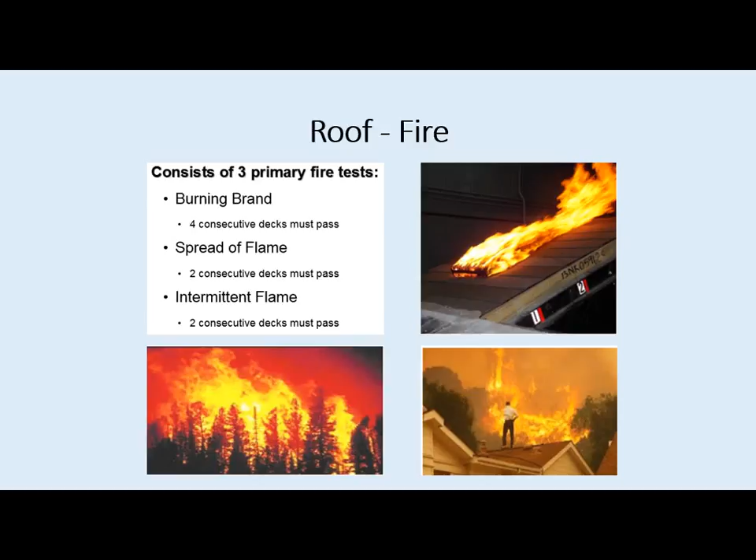And finally, we conduct tests on fire—that's another important factor in the design of a roof system. I'm looking at my time here, so I need to accelerate my speech a little bit.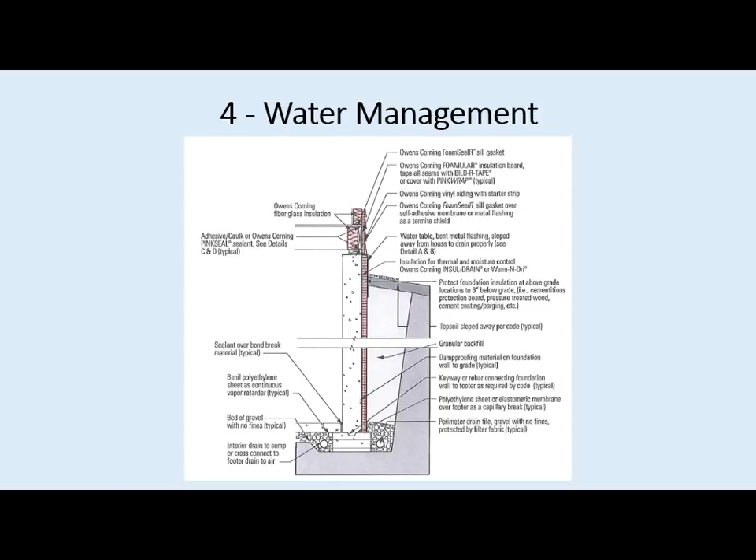Things you don't want to do: take all that water that you collected from your roof, run it down your downspout, put a little elbow on the bottom and say the job is done. All you've done is dumped all that water at your foundation, and you wonder why you have a wet basement.

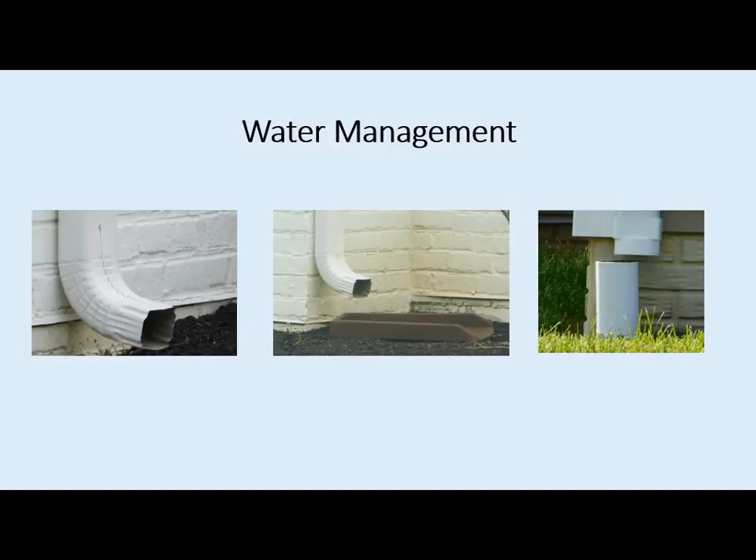So this, to me, is easily a problem seen, but it needs to be corrected. What you can do is install underground piping, but you actually need to connect it. Running it a little farther away from the house doesn't necessarily solve the problem either.

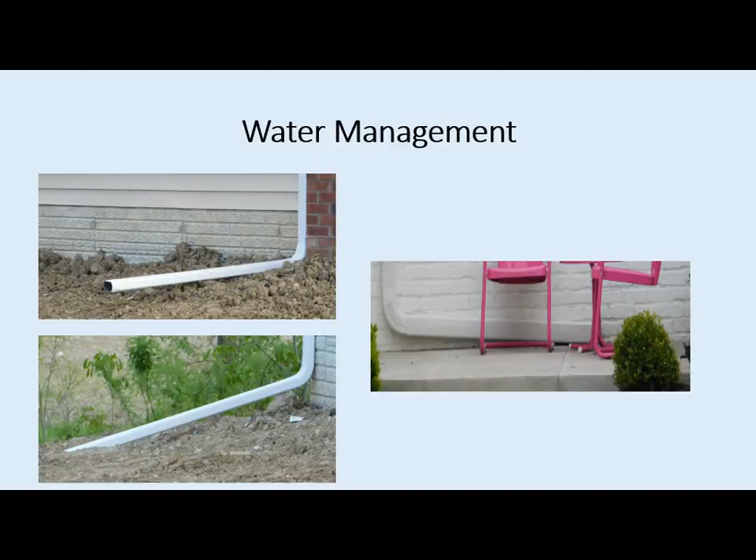So it's critical to pipe that water away from the house and connect all the joints that do that. But there will still be water beside the foundation, so what we recommend is a drainage system on the foundation, applied on the exterior. This takes the water and conducts it down to the drains at the bottom of the footers.

The last area I wanted to quickly talk about is acoustics. The problem here is noise is unwanted sound, and the solution is to reduce or block that so that it's no longer bothersome.

Now, this is something that most contractors don't design into houses. So if you're concerned about acoustics, you need to do this when you start with your contractor on day one, when you have a blank sheet of paper. Say, here's what I want to design.

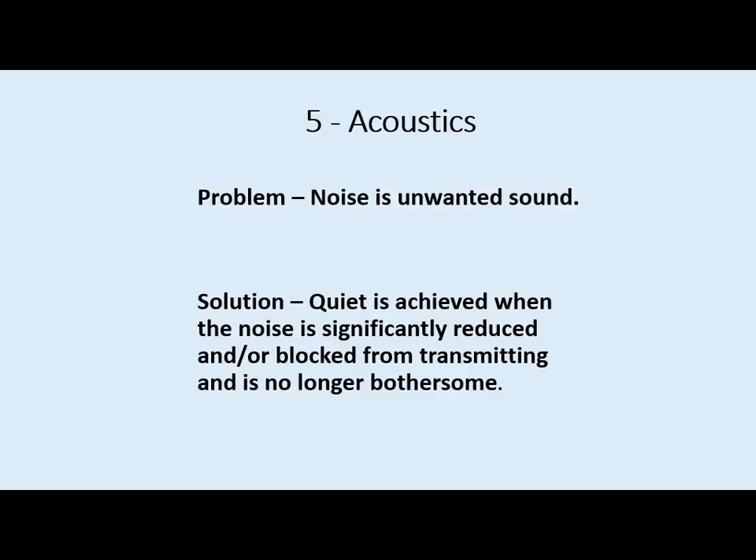So what do you want acoustic treatments for? Well, you might have a home office you'd like to have isolated, or isolate your bedrooms, or you have a dedicated entertainment room or home theater.

And where does the noise come from? It can be exterior, like traffic, airplanes, trains, lawnmowers from your neighbors. It can be interior, entertainment systems, exhaust fans, and as we're looking at house designs today, they're becoming more open concept. So you see the kitchen, dining, and family room as just one big space. There's no separation, so acoustically they're all connected.

So you want to watch your favorite sports game, and all of a sudden the exhaust fan comes on in the kitchen. You can't hear anything on your TV. This open concept design is not going to solve that problem. If you need to have an entertainment room, it needs to be acoustically isolated.

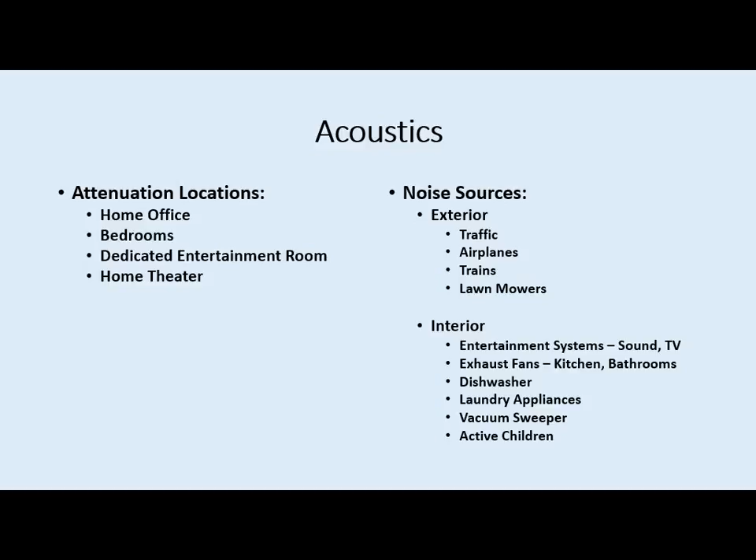So what do you have to target? Everything: ceilings, interior walls, exterior walls, floors, doors, ducts, plumbing, electrical boxes. You got to look at all of it, because sound is transmitted the same way air infiltration is transmitted, through the air. So there are solutions to each one of these problems.

In cavity insulation, you need to insulate all the ceilings, walls, and interior walls. So if you want to separate a bedroom from a room, you need to insulate that interior wall. Caulk all air paths. If you want to get good performance, use double layers of gypsum. Doors need to be solid wood core, not empty core doors.

You don't want doors undercut for your return air vent, because that just allows all the noise to come through. So you want to have a ducted return, but that ducted return should go just to that one building or one room. You don't want to have a duct on one side and a vent on the other side of the same wall. It'll just allow the noise to come through. So it should be separated in terms of ducting.

Same way with electrical outlets, you don't want those backed up from one room to the next. Ducts should be insulated, windows should be sealed, floors need blocking between rooms, and plumbing should be isolated.

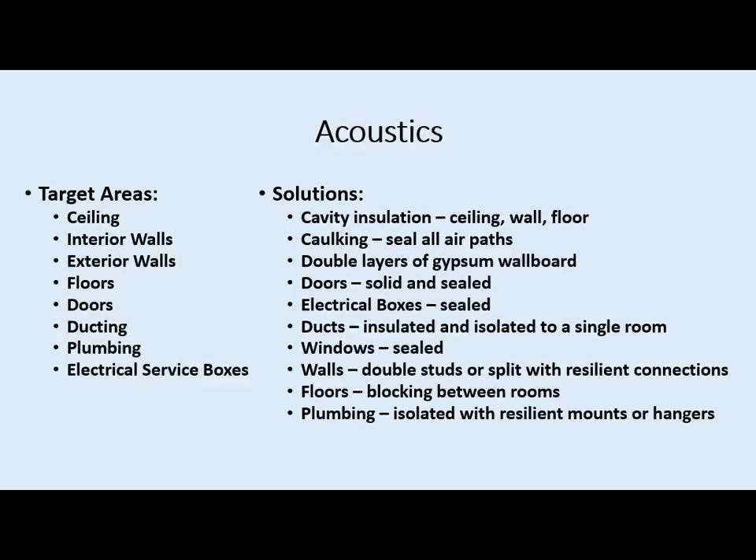So the basic principles: you can absorb that energy, you can block it, or you can have vibration breaks or isolators. What we're showing here is the impact of open penetrations. And we look at the curves, and as you start from the top and come down, that's the amount of opening that you have.

So the first one is 0.001 — that's pretty tight. But you get down to 0.01, well, that's still pretty tight, but you've lost some acoustic quality in that space you're trying to design. So it's very important to have all the penetrations well sealed.

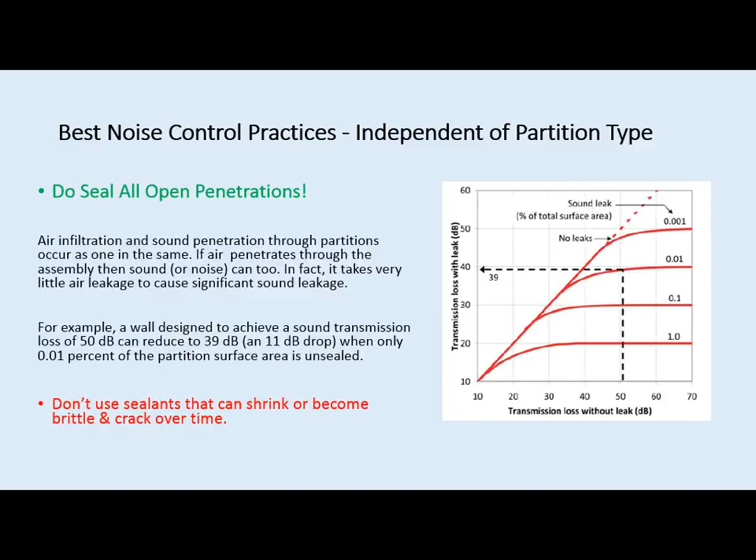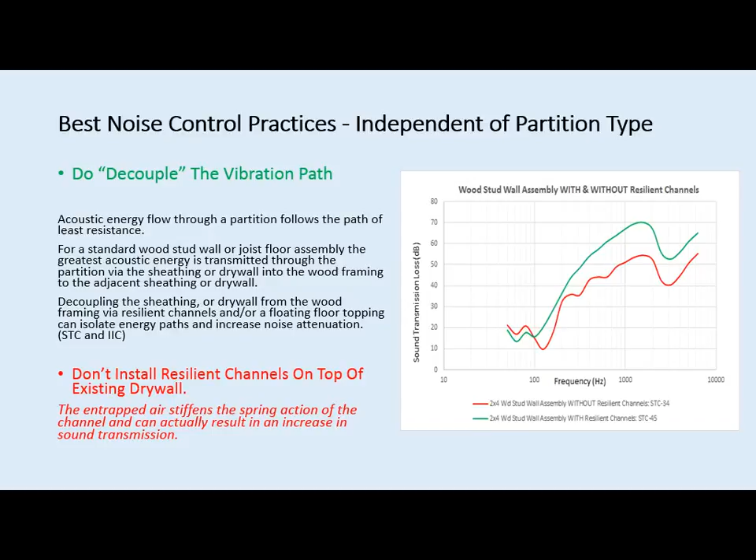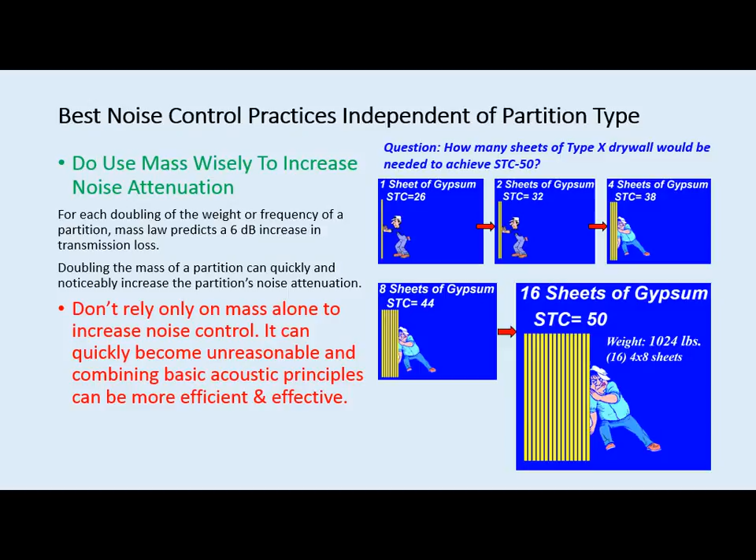You can decouple the vibration path between rooms with resilient channels or double studs, multiple options. You can use cavity insulation to insulate interior walls. And I mentioned earlier double drywall. Well, double drywall gives you some improvement, and some people think, if 2's good, 4's better, or 8 would even be better, but 16 would be ideal. Well, is your house going to support it? I don't think so. So there's an optimum design and how far you want to go with each of these features to achieve your end performance.

Another thing to consider is flanking losses. You think you've got your walls protected, but your floor is continuous. I design my house, build my floor, and set the partitions on top of that. That floor acts as a channel for vibrations to travel from one room to the next. So there are designs you need to consider there.

So all these designs are never addressed in a conventional home. If you're doing acoustics, this is above and beyond normal - it's very focused. We're just about out of time, so I'll take any other questions, if I haven't bored everybody to death yet.

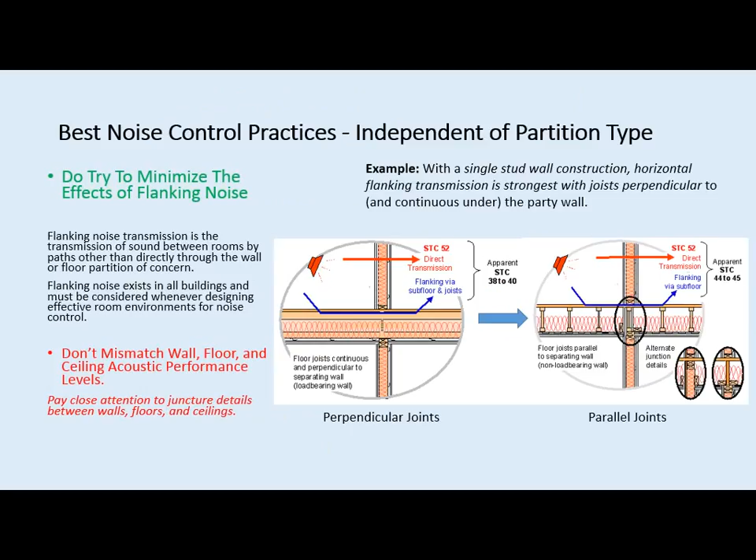Can we take a closer look at the infiltration, the various joints? Because you had them highlighted as most important to least important to reduce air infiltration. Yes.

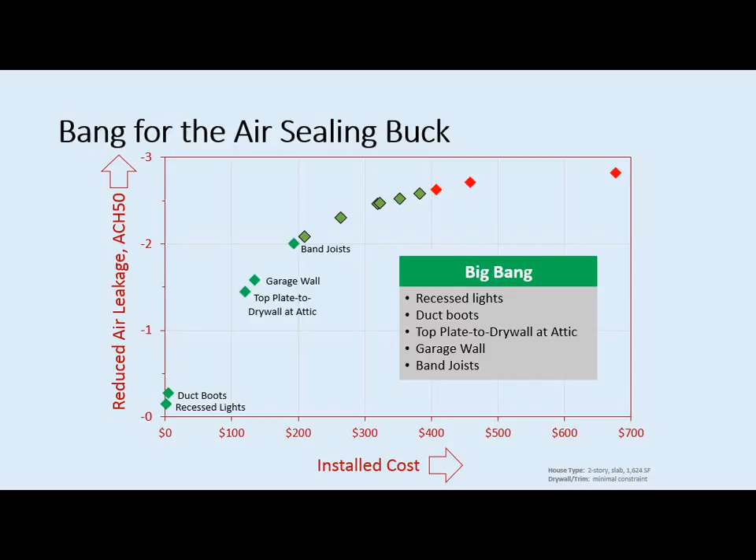All right, we start out with the most important thing to do, which is recessed lights in your ceiling, and duct boots - connecting the duct to the register needs to be well sealed. Then top plate to drywall, garage wall, and the band joist - those are the things you need to look at first. Those were the biggest bang items. Next would be outside corners, top plate, inside corners - I showed you some of those corner details, and those can be quite problematic. Bottom plates to the slab and to subfloors. The last item was between two top plates - when building the top plate you usually put on two layers, so you need to seal between those two plates. Also wood framing to sheathing, and the vertical sheathing joints on the outside - tape those. That's one of the last things to look at, if you've done everything else inside.

Does that answer your question? Okay. Yes? Is there any new advancement in terms of moisture management in your assembly?

Absolutely. The requirement in codes for walls is to install a vapor retarder on the interior. And with the addition of foam sheathing on the outside, you need to make sure that you're not trapping moisture, because it will get through eventually. So there are recommendations on the balance between the R-value of insulation in the cavity and the R-value of the sheathing, and those are climate sensitive. So it's not a single answer.